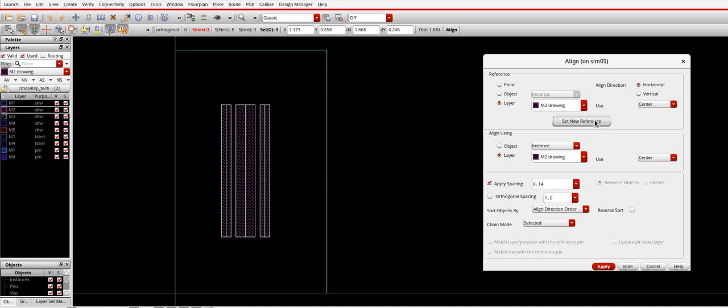Hide it. I want to draw it in M2, so I will draw these 3 lines. Okay, so I've drawn this. This is the metal. I'll quickly select this. I will widen it. 0.14. Okay, so now I'll select all of this and I will say align. I'll use the align option here. I'll create a spacing of 0.14. Metal is written, horizontal spacing, set a reference. Click on this, then just click apply. There you go. This is how your tool helps you quickly draw shielding nets. This is your example of sidewall shielding.

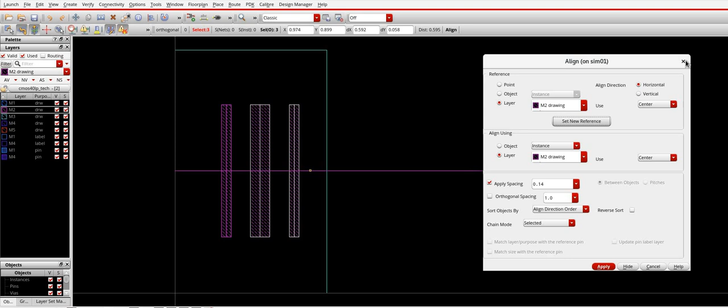If you want to stack this, you can very well select the metals and do it. Same thing applies for the stacked metals which we just saw. Okay, so that's how you take advantage of a couple of features of the tool to draw a bus. See how quickly it draws. If you didn't know this trick, you would have to draw 3 metals separately, measure them, space them apart, draw it. It would take a lot of time. Here, by click of a few buttons, you have it.

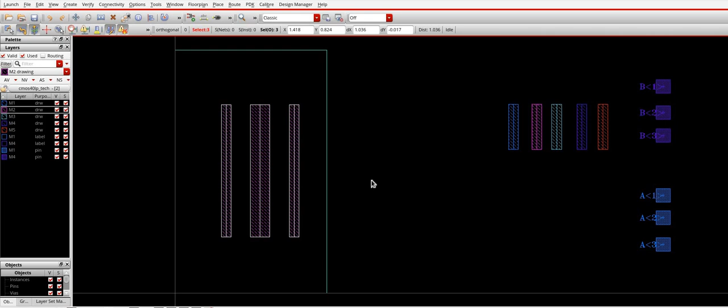Okay. So now, same case, if you want to create a coaxial shielding. This is a sidewall shielding. If you want to create a coaxial shielding, what would you do? Right? We'll take advantage of the same feature which we just studied in this video and the previous video and try to create a coaxial shielding over here. Okay, so let me go to create wire bus. Okay, 3.

Okay, I want 3 lines because we know that in a coaxial shielding, lower level you will have metal 1, middle you have the other net, the M2, and top you have metal 3. So the bottom plate, let's assume that this is the bottom plate. We need M1, M2, and M3. So the middle signal line is just M2. You're not drawing all the three because this is the main signal net which you're trying to draw.

Okay. So now over here, let's draw the same pattern again. M1, M2, M3. So here I'm trying to create a pattern with 3 patterns. In here you've got M1, M2, M3. Say one side of it. M2 is my signal line. M3 is the left side of it. So these two are the shielding nets, bottom and top, and this is my signal net.

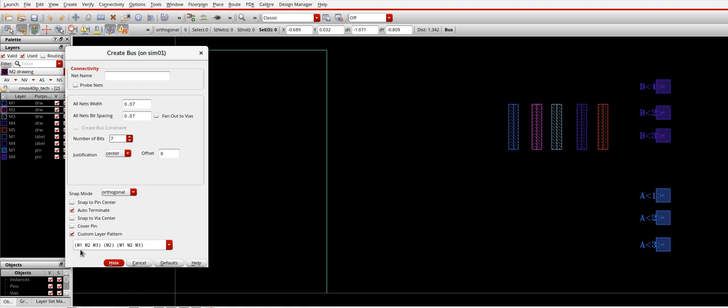So overall, if you see how many metal strips I'm expecting the tool to draw, these are 7. So I'll just mention it as 7 over here. And I've also mentioned the type of metals. I've mentioned the widths as well. Okay, so I'll just say hide, enter.

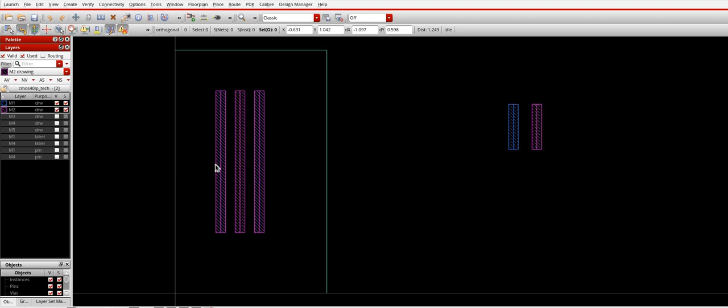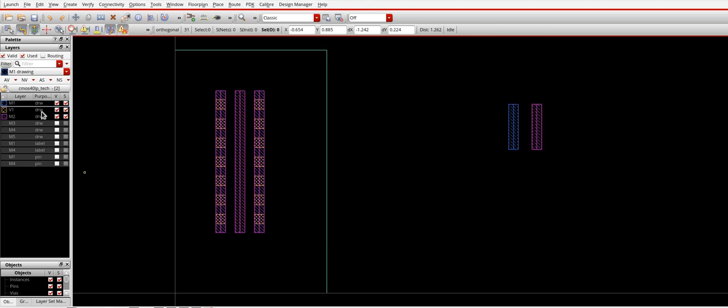Right. So now you see here, I've got M1. There is no M1 over here, right? M2. There's M1 and M2 over here. I will just add an auto via here. So let's just say 3. So I've created a shield here. So now I will have only M3 here. There's no M3 over here in the middle, right? So I will just draw again M2 and M3.

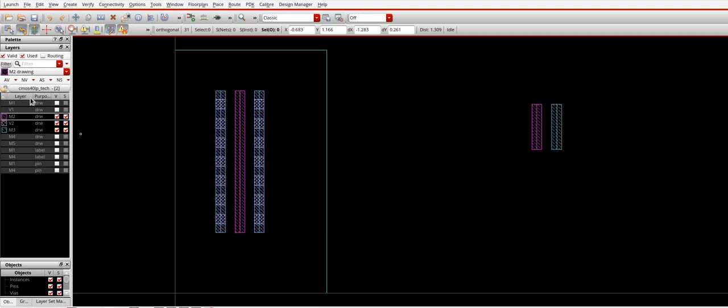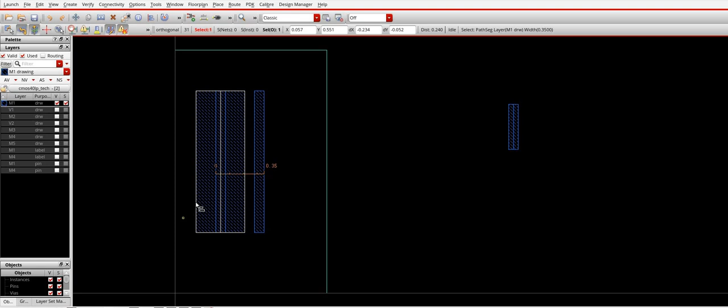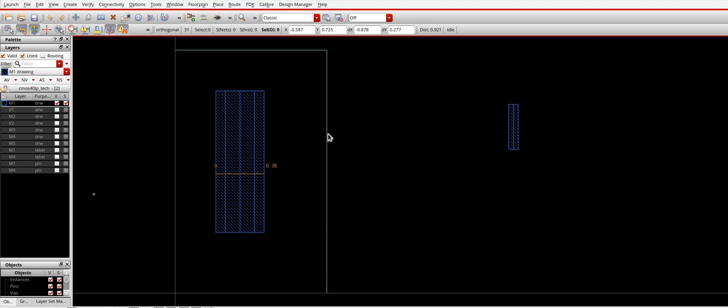Easy. So now I know that I will have to space them apart. You can just use the same feature. Now if I have to increase the width of the bottom plate, I'll just go down, measure this, 0.35, so just make it wider. You can just delete this guy if you wish to. This is your line. Okay, it's not picking up. Let me just move it. Now your top plate. Same way, just increase this.

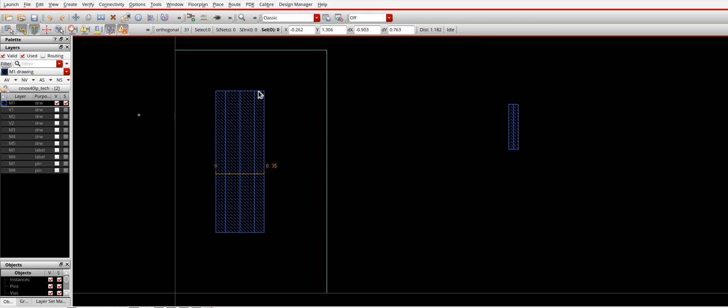There you go. So you have your M1, the bottom plate with the M1, M2 vias only at the edges, and you've got M2, which is a signal net. Ideally, you should be making this wider. In here, I've just shown the selection. Let me deactivate this. This is your signal net. This is the bottom plate. M2, the sidewall nets, M2, M3 via, and M3 on the top.

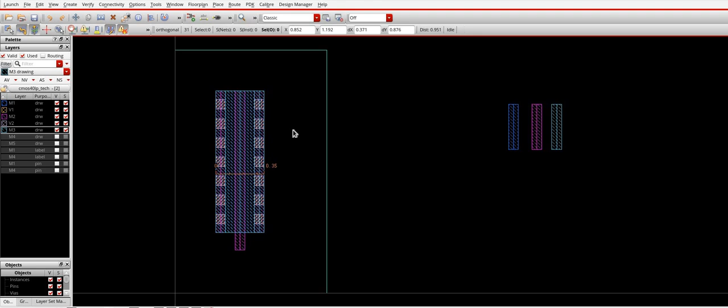This is how you create a coaxial shielding net. So this is how it helps the layout engineers to improve their routing skills. You learned sidewall shielding, coaxial shielding. I agree that we use coaxial shielding very rarely, but on similar lines, you can utilize these features, whatever you have learned in these videos, to help you do a shielding kind of routing more quickly.

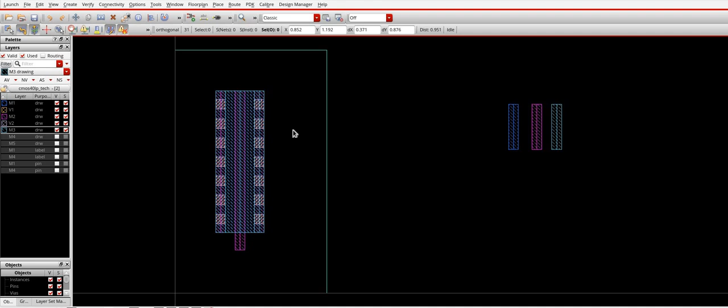Okay, and keep in mind that whatever patterns you've generated, every pattern will get stored for this session. So next time when you open another layout window in your design, you can pick up whatever pattern you had drawn, and it helps you. You don't have to enter these things again and again. So yeah, you can play around with these options. These are some of the options which I've taught you. Try to explore and learn more. I guess whatever I've taught will help you a lot.